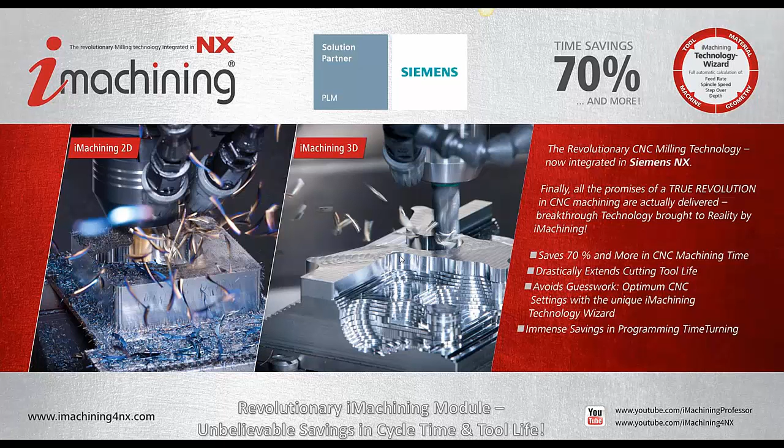So, a quick agenda. What we're going to do is I'd like to run through just a little bit of a history of iMachining for NX. Won't try to bore you to death with PowerPoint. We'll get through this as quickly as possible. But we would like to cover some of the technical differences between us and some of the other solutions out there as well. And then Greg is going to hop into showing you the actual software.

One thing I want to stress too, questions that come up, we'd like to address them on the fly. So if anything comes to mind or you want some more detail on anything, let's try to address them for you on the fly. So as far as the overview, we'll touch on how iMachining became a Siemens partner. We're going to talk about some of the technology differences between us and everybody else. We have one video at the end, and then Greg will hop into the software itself. So open Q&A at the end.

Siemens became aware of iMachining back at the EMO trade show in Germany in, what was it, Greg, 2013? Yep. Really were intrigued by what they saw and we approached each other, I think, and started development on the software. iMachining's been on the market. It's not new technology, 4 or 5 years, so you're not being a guinea pig. It's proven technology working around the globe. The integration to NX itself has just become our focus.

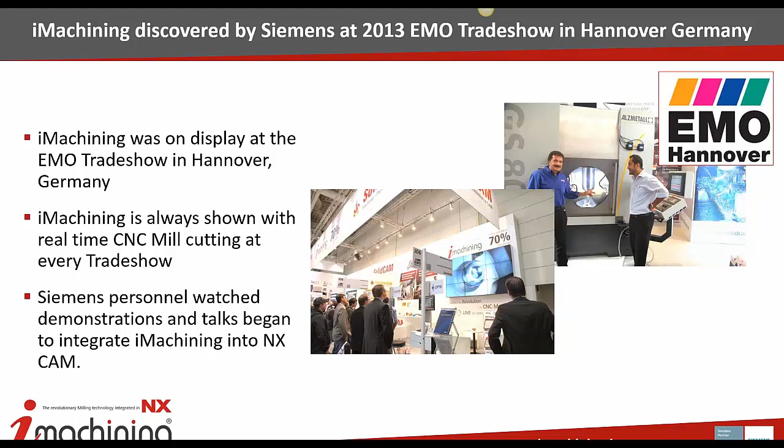So, a little bit of what it can do for our customers. Much faster cycle times. We're managing the tool's engagement in the material at all times, guys. So we're seeing tool life increases of anywhere from 2 to 10 times over traditional methods. Really performs well in the hard materials. Inconels, titaniums, the harder the material, the better iMachining is working. We're going to show you why.

The ability to use smaller, less expensive tools too, because we're managing that engagement in the material at all times. We're finding that customers can use smaller, less expensive tools and actually get better productivity. So, if people are familiar with NX, we feel like with the iMachining technology wizard and already having a background with NX, it should be easy to really learn the software and become productive with it.

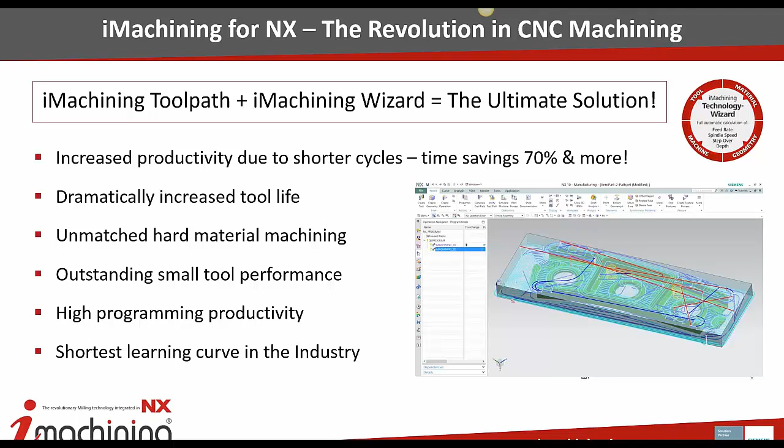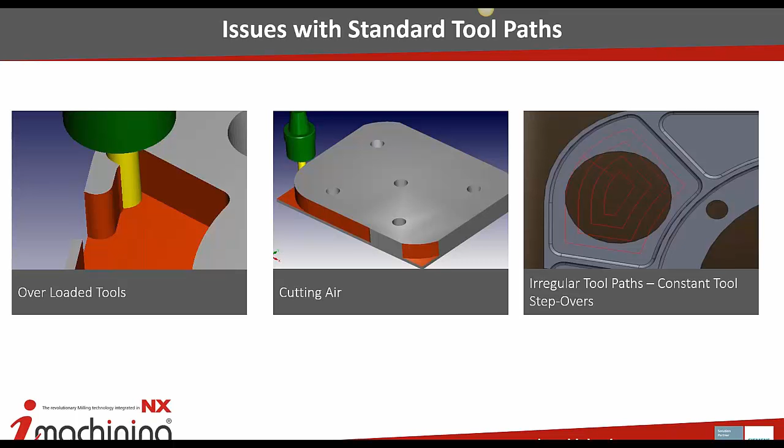Just touching on some of the technological differences between traditional milling and iMachining. Some of these scenarios might look familiar. Typical milling or machining, you're running a tool into 180-degree engagement, and that's tough on the machine, it's tough on the tool. You have to slow things down in order to accommodate for those corners. So typically, if you're not working on a model, a lot of air cutting, and also irregular tool paths. So you're typically using constant tool step overs.

So some of the things that iMachining is going to do, I'll throw this over to you, Greg, if you wouldn't mind. So what we do is we maintain controlled step overs. We're looking for a minimum and maximum engagement, and we maintain those. And as we're doing that, we're also adjusting feed rates as well. So if your engagement goes down, your feed rates go up to maintain a consistent chip load.

As we're machining, we're constantly updating the in-process workpiece. So we're aware of where we've cut, and we know where we need to go. And we're always trying to do intelligent transitions from cut area to cut area. Sometimes we determine that we're not going to retract completely out of the part and move over. We'll slightly move down or slightly move up a couple thousandths and transition to the other side of a pocket at a fast speed. We don't typically rapid when we do that.

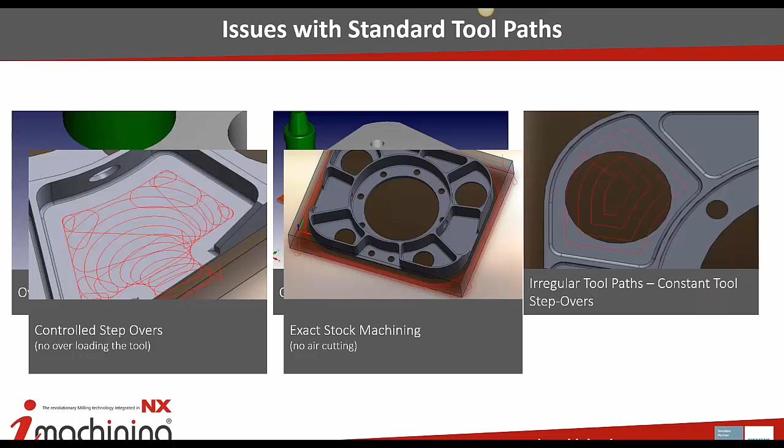We give the customers the ability to rapid. The majority of the time, we control like a 500, 600, or 1,000 inches per minute feed rate over to the other position. And we can transition around the part and do a contoured transition to another area. Smooth tangent tool path, so we're always trying to roll in and roll out of the material. So you're getting a thin chip as you're going into the cut, and you're getting a thin chip as you're coming out of the cut, to make those transitions easier.

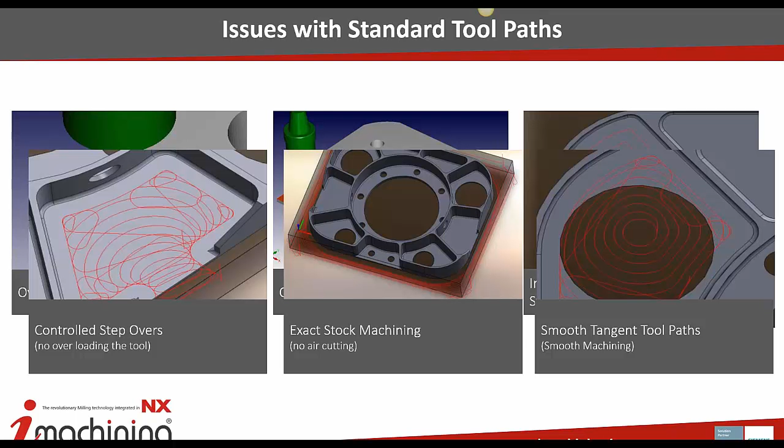Can you speak up just a little bit? Sure. Sure. Recording.

Some of our patented features in iMachining. One thing we do that nobody else is able to do is a spiral morph, which is the most efficient way to remove material from a specific area. And we do that by maintaining a minimum and maximum engagement. And working from the center out, we start at a spiral, and as we transition out, we try to create the shape of the boundary that we're cutting.

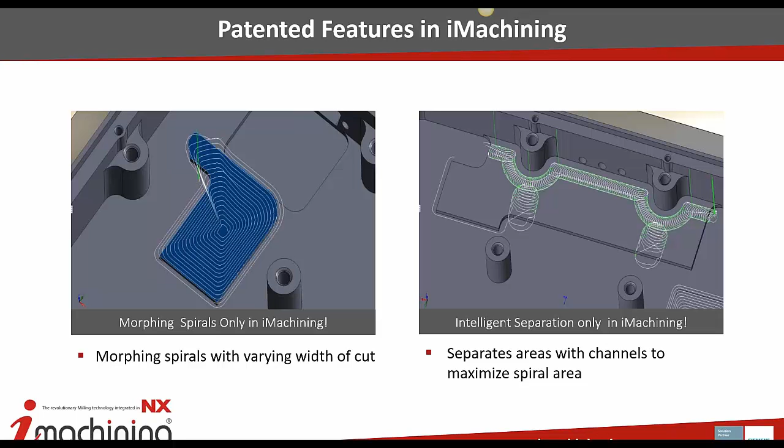Another thing that we do is separation. So we look at a specific area and determine, would it be more efficient to do a spiral morph for this whole area, or would we separate it out into individual channels and then create 3 independent spiral morphed areas? So we do time calculation with both results, and we pick whichever one's faster. This kind of shows what a finished channeled and then spiral morphed area would look like.

Some people in the room might be familiar with the term trochoidal, and we get compared with that a lot. We don't do a traditional trochoidal. We do what is D-shaped contouring when we do a slot. So we transition, engage into the material, make a cut, transition out, move slightly up, and fast feed across. So you're not doing a consistent feed rate and doing large circles.

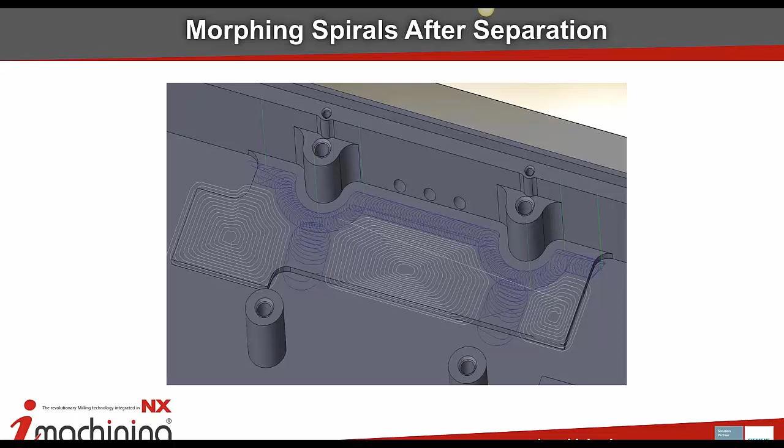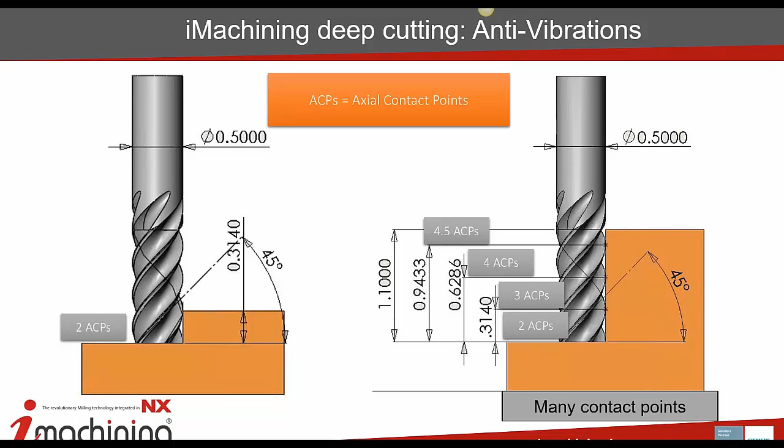Another thing that we do when we're looking at cutting tools, and you provide us with information on helix angle, the type of material, one thing that we're looking at specifically is the helix angle, and we try to maintain what we call ACPs, which is an actual axial contact point along the flute. We try to maintain a minimum of 3 contact points based on your depth of cut to add stability to the process. So you're not getting an interrupted flute coming in and out of the cut without another flute being in contact at the same time.

This is an example of rest machining in specific areas. You can see that we tried to do as little motion as possible. We transition down in the part. We're not retracting up unless we have to.

It's kind of interesting because the genesis of the technology, everyone, was for corner picking. And the developers at our company started figuring out, boy, that's an efficient tool path. How can we apply that to cutting an entire part? Went to work on that, and it's really been a nice solution.

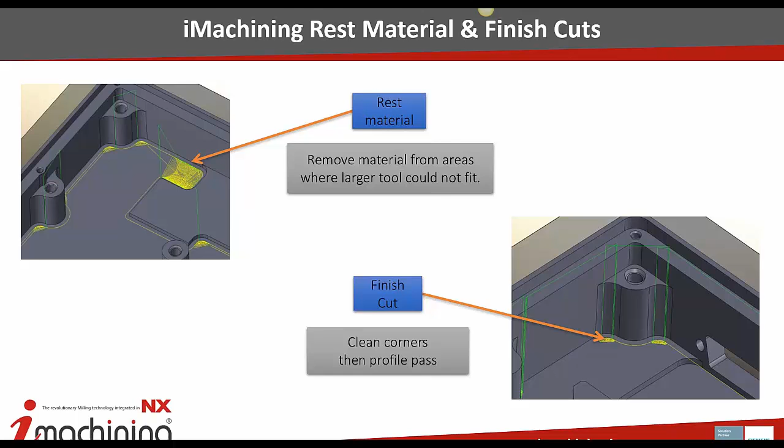Another thing we do that nobody else is currently doing is what we call scallop height tolerances. So when we manufacture a pocket, we'll go full depth, and then we'll do a scallop height calculation. If you're on a contoured surface or an angled 5-axis wall, we'll come back after we went full depth and move up those features and create a scalloped area. So you're not having to create a semi-finished path to come back in and clean those areas up to go into a finished operation.

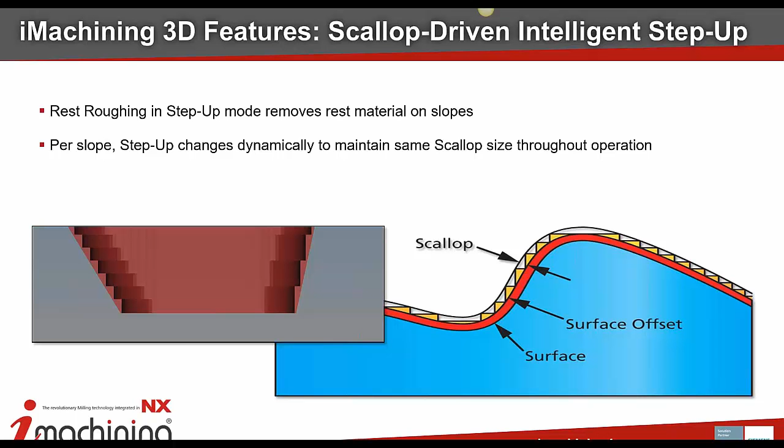This is really kind of what we're utilizing with the iMachining technology. And in a nutshell, we're taking into account the machine, the material being cut, the geometry of the part, and the tool that you're using, and giving you what we call a machining level. Greg's going to talk about this in the software, so I won't beat it to death right now. But it's really like putting a skilled machinist at your fingertips.

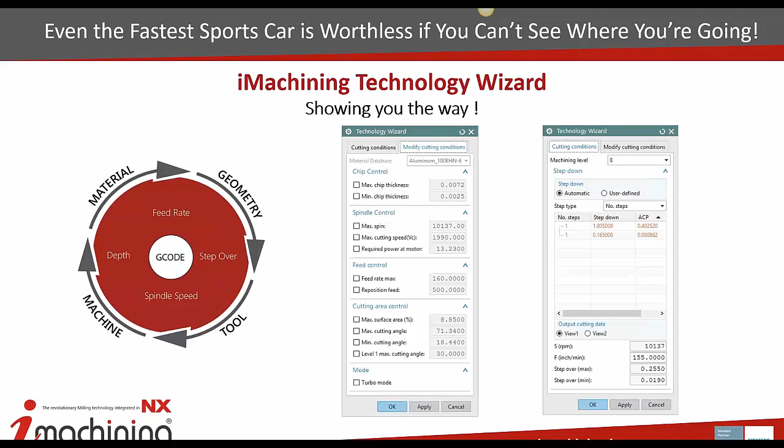And for anyone in the room that is a highly skilled machinist, I feel like it really gets you to most efficiency on that first part versus having to guess or kind of slow things down to make sure you get it and then ramp that up. So we'll talk about this in a little bit more detail. It really can help improve efficiency all around. Again, there's 4 things that we're managing. Material, Craig, if you would.

These are the things we look at in regards to the material itself. Hardness is one of the keys. As far as the tools that you're using, those are what we're monitoring. And it's situational per the part and per the job. So we're analyzing that each time you're having to program a part. The geometry itself, we're looking at the maximum depth going down as far as we can every time. And then the machine, we're looking at the maximum power of the machine, the maximum spindle speed, and the maximum feed rate. So we're doing all the hard work in the background based on these parameters.

Again, not to run any of my competitors down, but what we're seeing is they're doing full engagement, full depth cutting, but there's still a lot of manual data that has to be entered. I've seen one where you have kind of a spreadsheet. Machine could be this and material could be this, and you're having to kind of figure out. We're doing that all automatically for our customers.

One thing I'd like to touch on is the max power. So one reason we do max power is if you do a lot of aluminum machining, we have the ability to base feeds and speeds and depth of cut based on utilizing as much horsepower as possible. So we'll increase feed rates, increase depths of cuts, and based off the type of material, we will determine how to get it to the maximum horsepower.

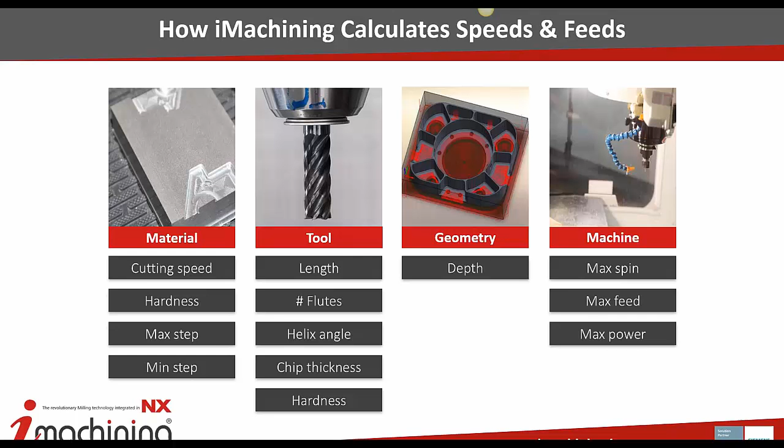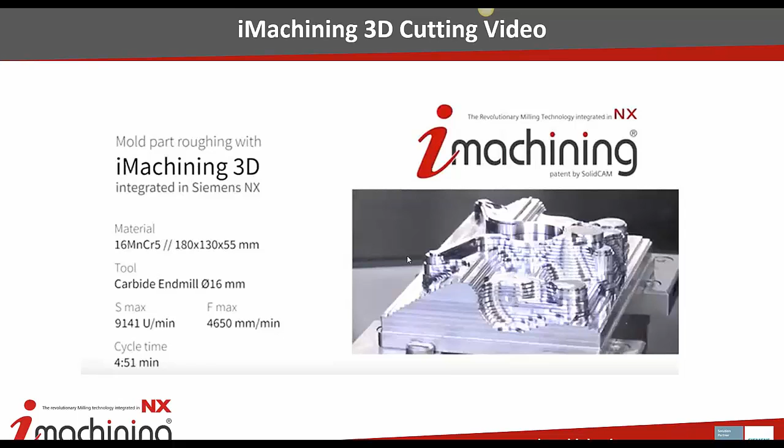Everybody still awake? I got an eraser up here. What is this one? 3D mode. Yeah, you can show that. You get your phone camera.

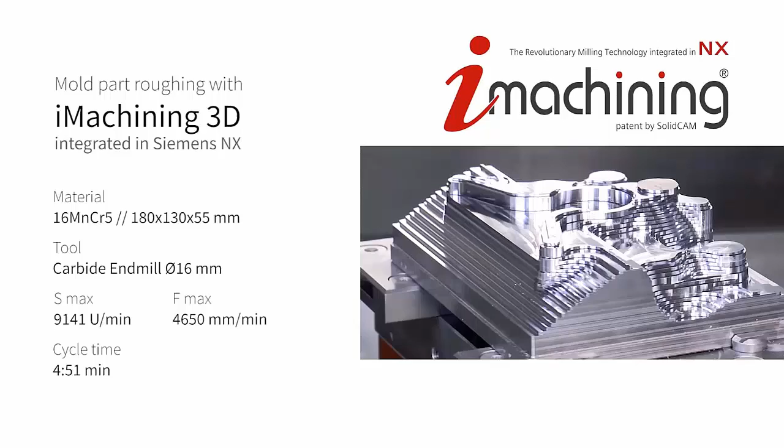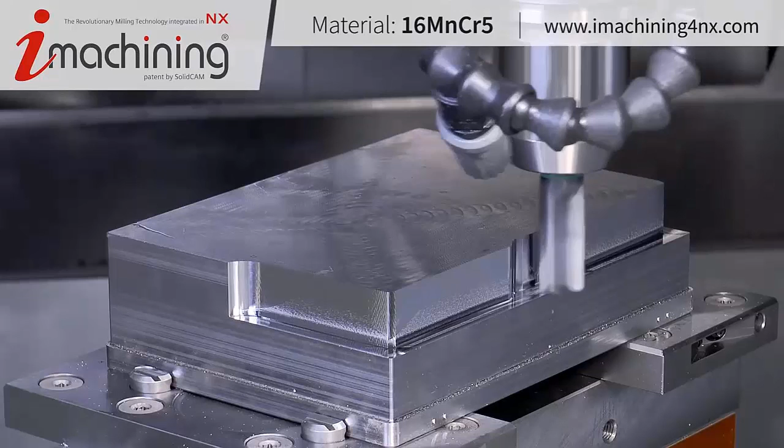A short video and then we'll... So this is a good example of scallop and how we maintain it. You'll see how we're trying to pull that at first, spiral morphing in, creating final shape, doing the final taking the corners. So as you can see, when we're transitioning back into the other corner, that's not at a standard feed rate. We're just doing a fast feed to get back there instead of doing the traditional coming back up, going over the part, coming back down and wasting time.

You can see right here is a good example of that transition. Different angles, all these points are identical, so it really helps speed up the finishing to do better finish faster. Less stress on the tool and the machine. And it's not on a Z-level base. So if we have a feature, as you can see here, that is not as steep of an incline, we do less cuts there. The area that's more steep, we'll add extra passes in there to maintain that scallop height.

One of the other common misconceptions that we seem to run across is, okay, great, I like the technology. Now you're going to force me to buy a $500,000, 25,000 RPM spindle machine to get the result. And that's actually false. What we're finding is even older CNC machines, because we're managing all those parameters, we're maximizing any machine, no matter what the age and capabilities. So we have had instances of people looking at having to add a machine. They got better productivity with iMachining and could put off adding another CNC.

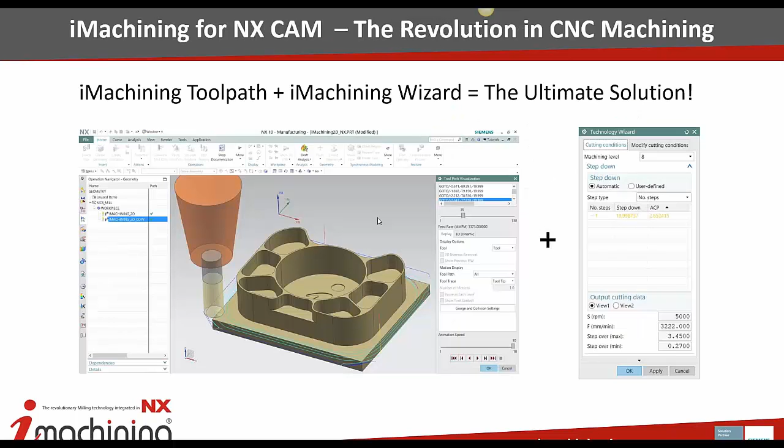That is kind of it, I believe, Greg, for the PowerPoint, correct? That's the last slide right there. Any questions? If there are any questions, we'll take those now. Otherwise, let's hop into the software. Anyone? All right, let's do it.

I don't know if it's better. Can you guys in the back tell me? Oops, not this one. Which one was it, Chad? Yeah, the one on the left. There you go. Is that good for everybody still? Nobody wants to work in my face. Another back.

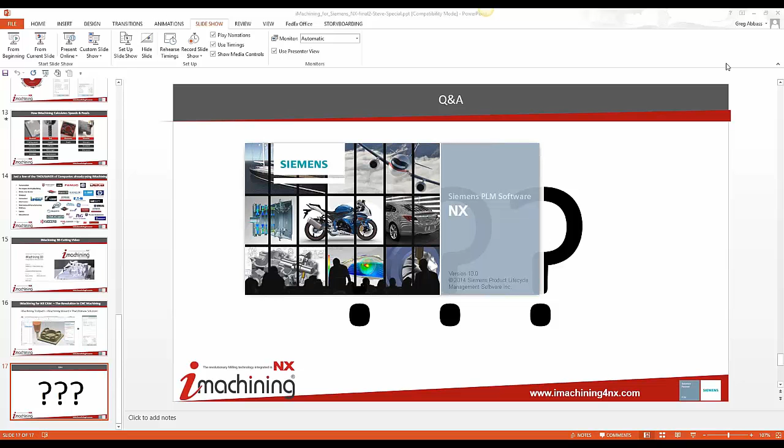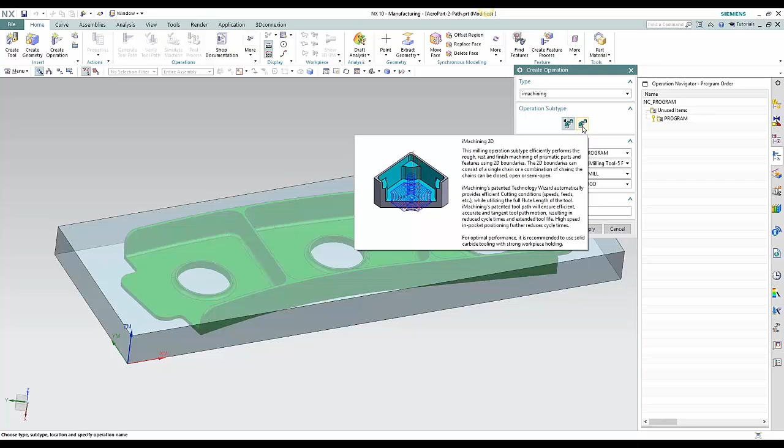All right, so to start off showing the software, I'll go over a few things initially. First being the two types of operations that we provide and where they're located. So typically, as in NX, you're going to go find iMachining in the drop-down, and we provide a 3D toolpath as well as a 2D toolpath. 3D works very similar to cavity mill, but with our technology. Geometry selection, you're selecting a part model, a stock model, check geometry, things like that. 2D, you're selecting a boundary, just like you would in planar mill. So we'll start off going through an operation.

I've already got some tools built, unless anybody would like me to go through building a tool or showing that part of it. Okay. Select the workpiece. So this is the interface for iMachining for the 2D side of it. We'll start off by going through some of the settings and how they work. We're looking for a few things. We look for what machine you're currently wanting to work on. I've got a few options there. And the type of material. We've got a pretty extensive library that comes in the install of alloy steels, carbon steels, tool steels. So we'll select aluminum for now.

And then we also look for something called a machining risk. What this does is gives you the ability to say, is my setup secure? Am I working in a vise low on the table, or am I working up in the air, and I'm kind of concerned that we're going to get vibrations? You've got the ability to adjust parameters based on your setup.

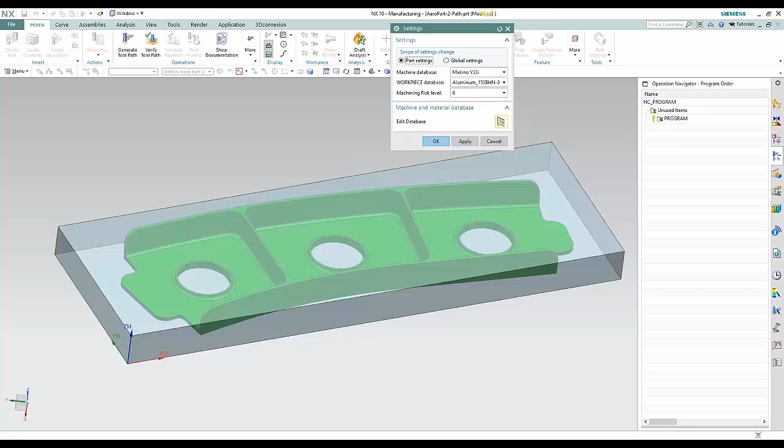And the steels, so if you go to create in the material database, if you go there to create a new material, so we'll just create a test material. What we're looking for specifically is the ultimate tensile strength. You can go to MatWeb online and get this for most materials that are out there. And then the machinability factor of that material. And then you have the ability to hard code some limits if you would like, or you can allow the system to do it automatically.

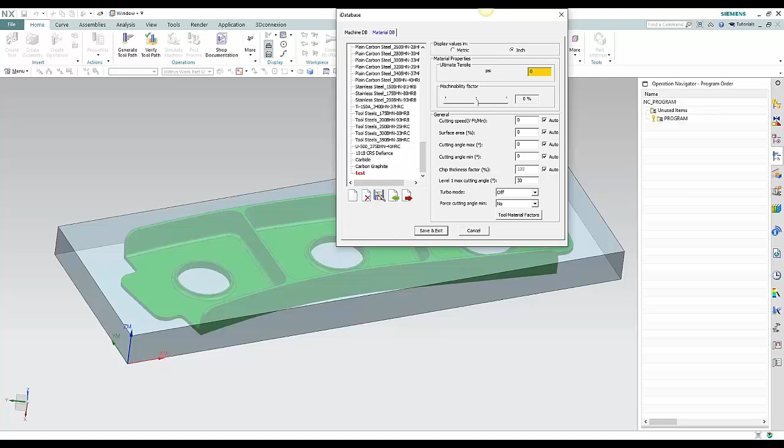So with that, we also have some technologies inside of 2D iMachining: iFinish, iRest, iRough. iRough is traditional roughing toolpath. iFinish is after you've created a roughing path. If you want to turn that into a finish, you just copy it, bring it down to the next level, and turn it to iFinish, regenerate, and then it creates the finish path for you. iRest, we can do one of two things. We can look at a previous tool, or we can select a previous iMachining operation to grab the updated stock from.

So geometry selection is a little bit different. It is internal to the interface. So we'll just come in here and we'll select these 3 cylinders. And then from there, you've got the ability to do 3+2 if you want to do it on an angle to the part. If you're doing 3-axis work, we'll leave it at standard tool axis. And we're also setting cutting levels in this operation. So we're looking for the clearance level, the upper level, and the depth. You can use model features to select this.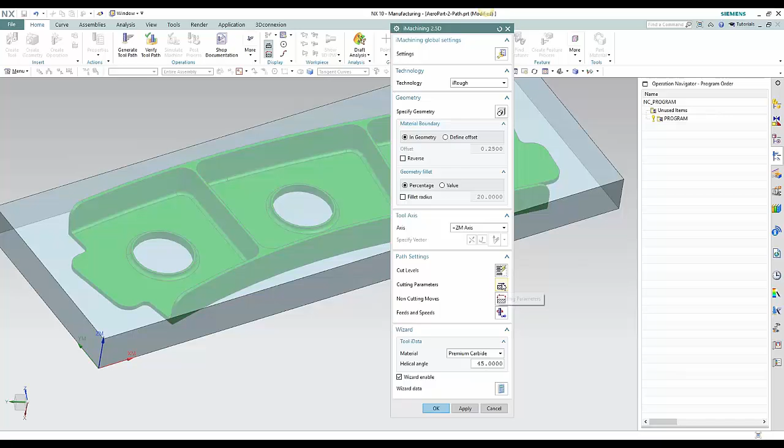Cutting parameters. There are some features in here to control specific things. You can control the step downs if you're not using the wizard. Wall offset, island offset, floor offset. You get the ability, so I showed you in the PowerPoint channeling. So you've got the ability to modify those channels as well. You can say I want the channel to be 1 inch instead of 3/4 of an inch wide. You can also do what we look for as a thin wall. So if you're coming up to an island or another thin wall and you don't want that wall to get below a specific thickness, we've also got the ability to control that as well.

Arc fitting, if you've got older equipment, instead of linearizing all the motion, we can kind of do a poor man's NURBS, if you will. We'll take those generated points and create an arc to best fit.

So from here, here's where your tool selection is. Like I said earlier, you've got carbide, cobalt, high-speed steel, and premium carbide. And then we're also looking for the helix angle of the tool to find out what the actual contact points are. And this is kind of a wizard, as you saw earlier. And we're looking for a few things here. Machining level is basically how aggressive do you want to be. 1 being the lightest cut, 8 being the largest cut.

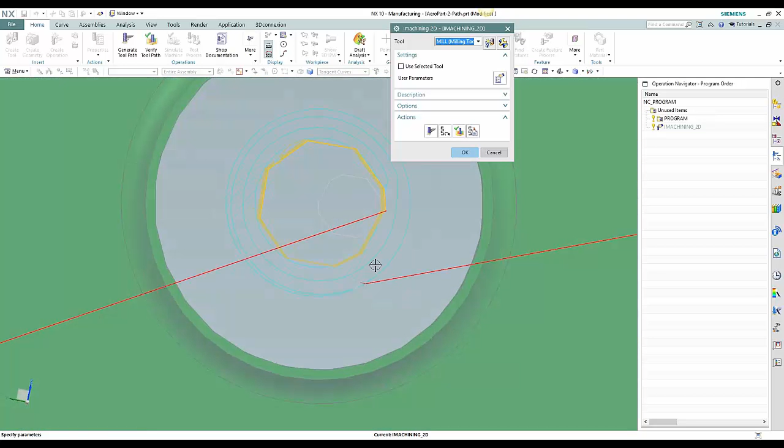So, from there, we'll generate the toolpath. As you can see, it's a circular hole, so you get a helical entry, and then you get a spiral out. Like I said earlier, if you wanted to create a finish operation, you can copy and paste it, come back in, change it to an iFinish.

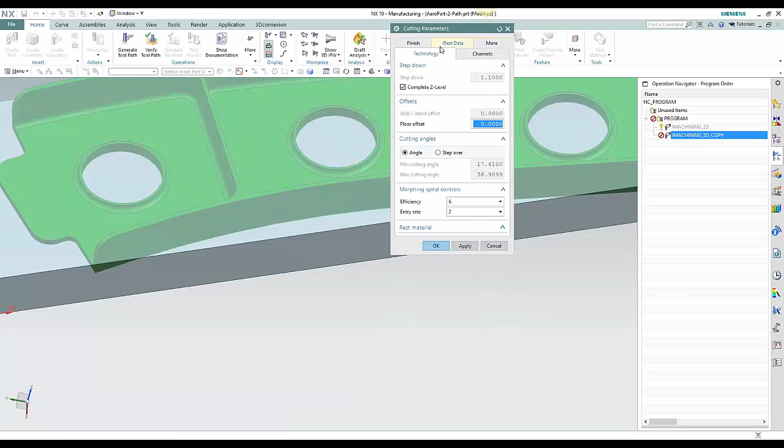Select the previous operation so it knows where it was, and generate. So now you've got a finish path.

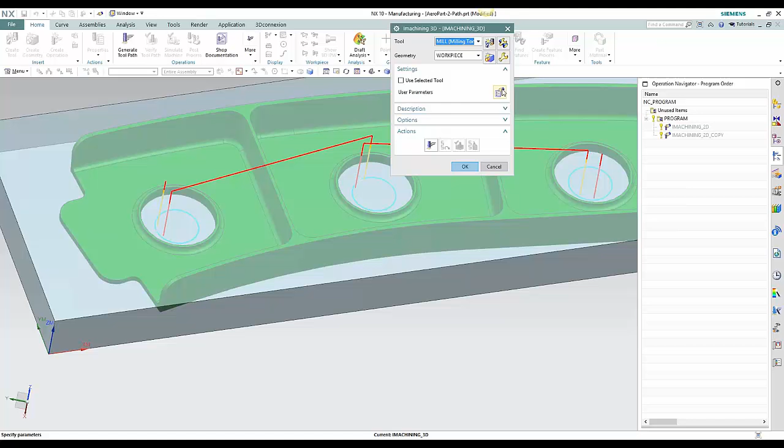So from here we'll go and we'll do a 3D iMachining operation. Majority of the interface is the same. There are a few extra things that may need to be filled out or used. We're looking for a geometry group with a part and stock in it. Even in the 2D operations, we do require at least having a geometry group built so we can update the stock and pass it to the other iMachining operations.

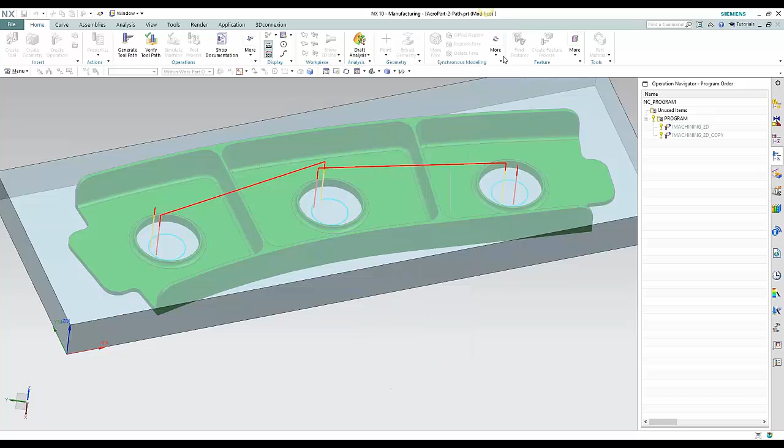Settings are the same. I don't have to come back in here and reselect everything. We update at the main level. When you create your first operation, it stays in the file. You don't have to push it or do anything. So it maintains all of its settings from the previous selection.

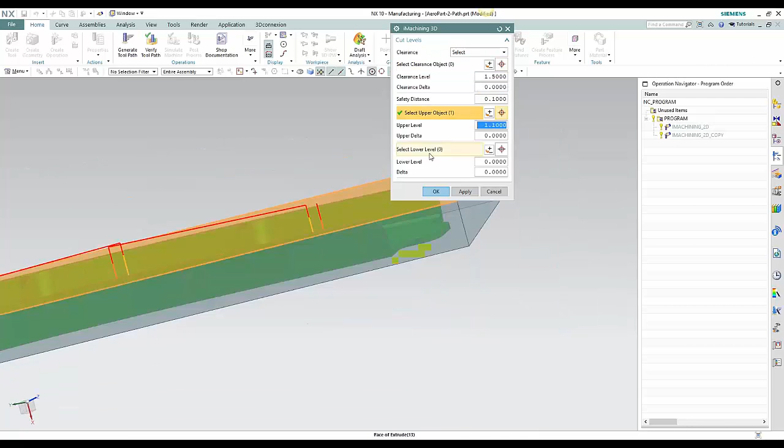So for 3D, we'll do the same thing. We'll select our clearance level, our upper level, and I'll come in and I'll just select a feature on the part.

So in the cutting parameters, there are a few things. So we talked about scallop height. You can either do it by scallop or you can do it by constant. Typically, I do it by scallop. You've got the ability to come in here and modify what you want that scallop height to be. If you wanted it to be 5/10 or 5/1000, you can come in and modify it. We'll just make it 150. And we'll generate.

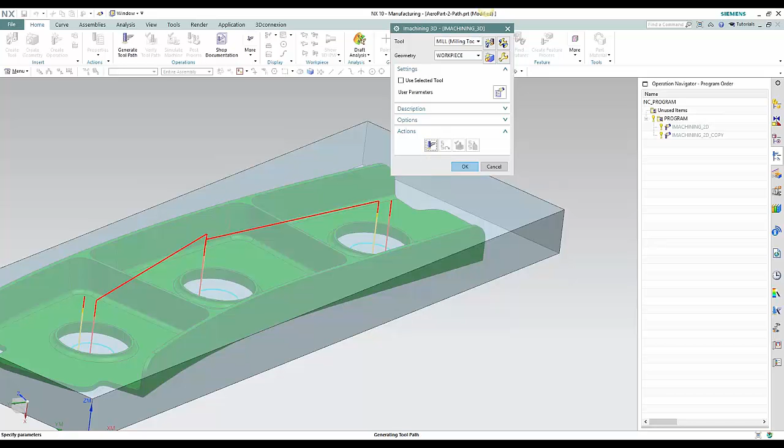Any questions while it's generating? Yeah, you can do an entry hole. You don't have to select an entry point either. We know the hole's there, so we'll use that if we deem that that's the most efficient way to get into the material.

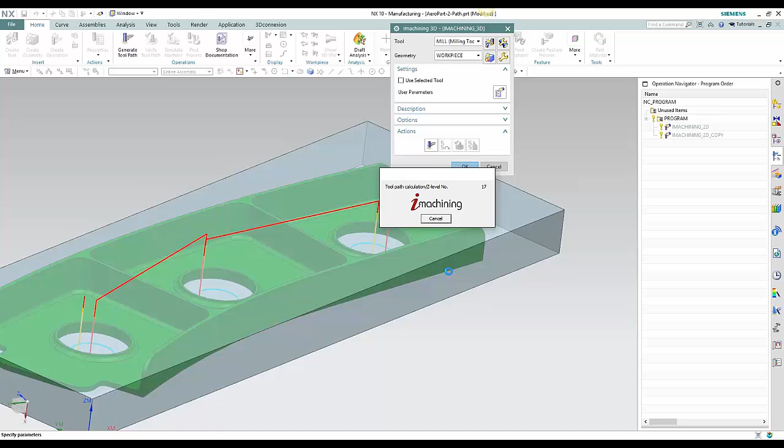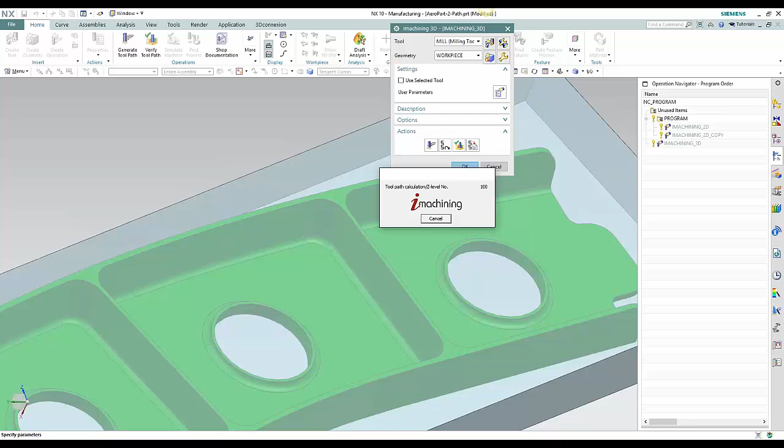So there's the operation. You also have the ability to do a trim boundary. So if you wanted to come in here and say, I want to do a working area, come in, select tangent curves, and say, I want to do that pocket there, and recalculate. This part's not big enough to show you. I'm going to open up a larger part and show you some of the processing stuff that's going on in the background as well. So you've got the ability to select a specific area if you want to stay inside of it.

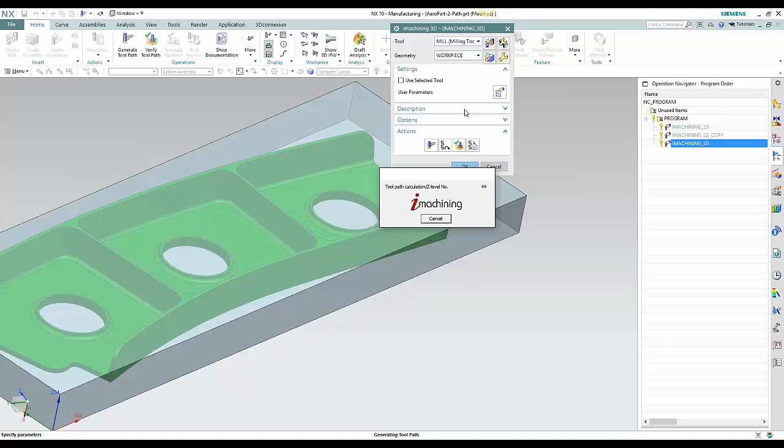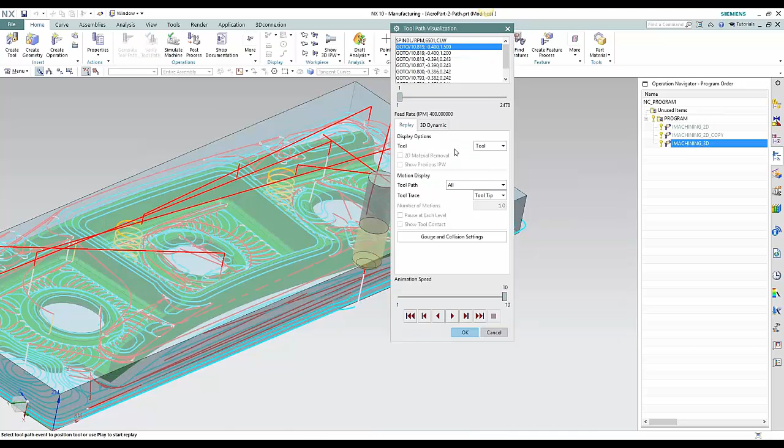And if you're curious how it works with Siemens internal operations, you can do a planar mill operation, you can do a 2D operation, you can then do a 3D iMachining, you can flip-flop back in and out of sequential mill. As long as you're updating the stock through a geometry group, we know what's machined and we use it as well. Verification works the same. So if you want to do a 3D verify, you can come in and do a 3D verification.

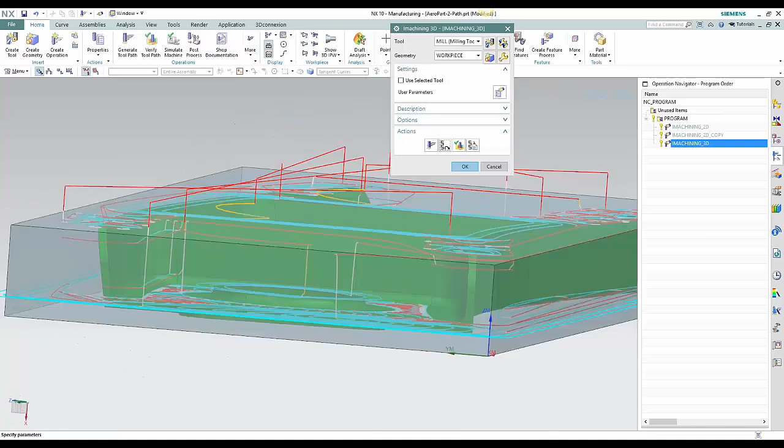Also, you can see one side's a 3-axis wall. The other side is a 5-axis swarf wall. So you can see where there's one path down at the main level on the 3-axis wall, and then on the 5-axis wall, we come back in and clean some of those scallop heights out that would be there because the wall's tilted out. I'll open up another part, kind of show you some other things.

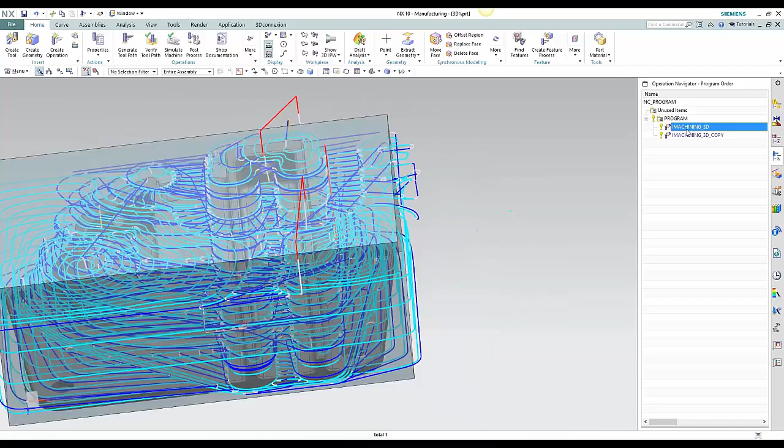This is more of a contoured part. So you can see we're coming in, we're scalloping as well. So we'll kind of verify this so you can see some of the motion.

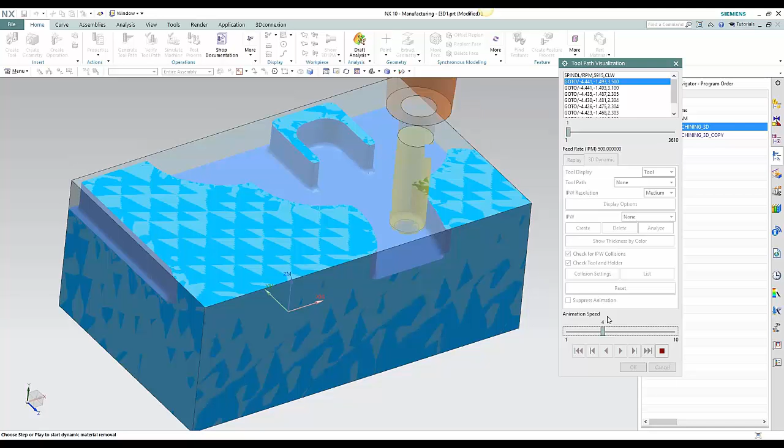One thing we do, I don't know if it's going to show it here, but if we do channeling, and then we come back from another direction, like it just did previously. As we exit, we also change how we approach the material. We try not to leave peaks, and if there's a peak, we'll come back out from the other side and roll into it and roll around it instead of just coming straight at it and trying to contact it with the flute of the tool.

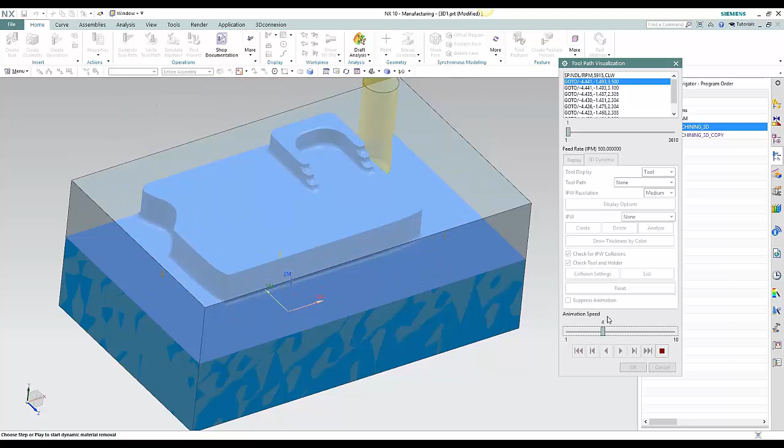So you can kind of see it does the main level, and then we're going to come back as soon as this finishes. We're going to pick up any of those scallop heights.

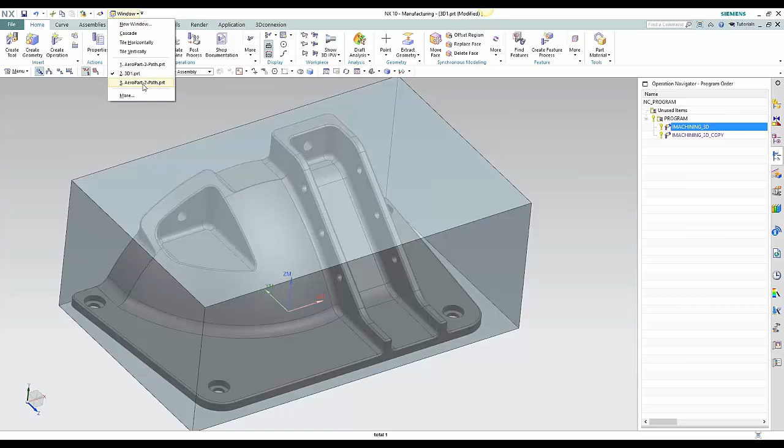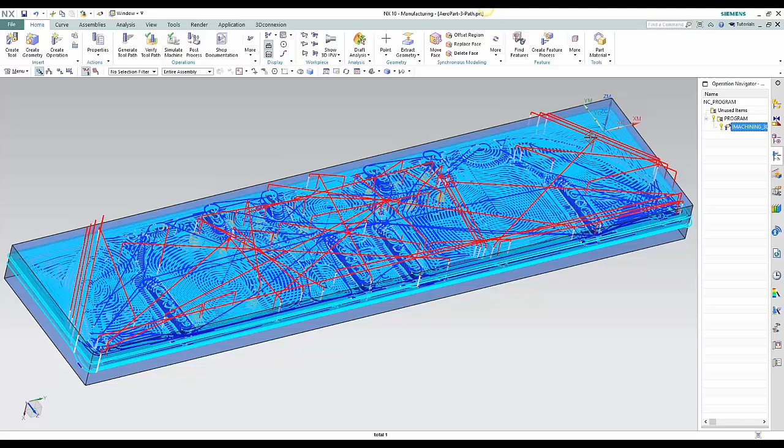I kind of wanted to show you guys this as well. It's a much larger part. I think the part's about 180 inches or 110 inches long by about 40 inches wide, so there's a lot of motion in there. There is an increased time for generation because of the size and the amount of motion, but we try to handle it as efficiently as possible to keep generation times down as well.

So if you see, what we do initially is we layer the part, determine each level, and then once we've done that, you'll see the CPUs will go. We'll utilize as much of the CPU as possible. Once we know the levels, we take each level and send it out to a separate core.

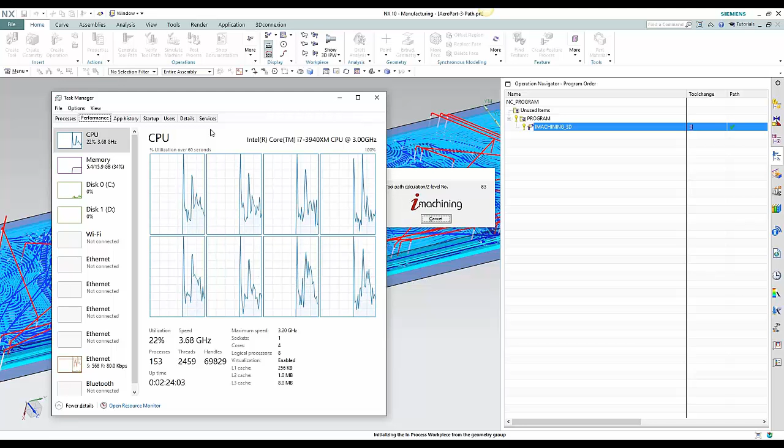You talked about the ability to kind of differentiate. You have some choices. You can really have iMachining pay attention to tool life or cutting speed. With level settings and stuff? Exactly. Sure.

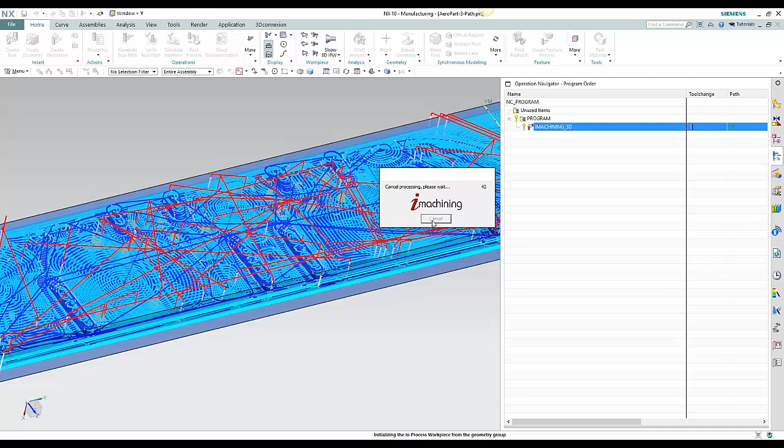Yeah, I got a question. You talked about how that 70% number was calculated between time periods. Can you give us maybe some case studies on that? We do have some. Or maybe some averages that you typically see. Obviously, that's a pretty big one.

Yeah, I mean, it's subjective, as any number is. It's based off of traditional type tool paths, full slots, taking smaller depth of cuts, and using a traditional style tool path. That is really what that 70% is geared towards. It could be less than that. It could be more than that. It depends on the specific application, and that's just kind of our rule of thumb of what we see on average from our users that are using the traditional constant step over tool path.

It's kind of interesting too, because Greg and I had, as part of one of the videos, an Inconel pocket that I believe a gentleman in Colorado was cutting, and he was getting one pocket per tool, and it was taking him about 2.5 hours. He investigated the technology, and it wasn't my customer, so I'm not sure of the specific numbers, but I know we were cutting that same pocket in about 20 to 25 minutes for him. And we cut 5 pockets. He had a bar of material. We cut 5 pockets, and the application engineer said he could probably have gotten 1 or 2 more pockets out of that same tool.

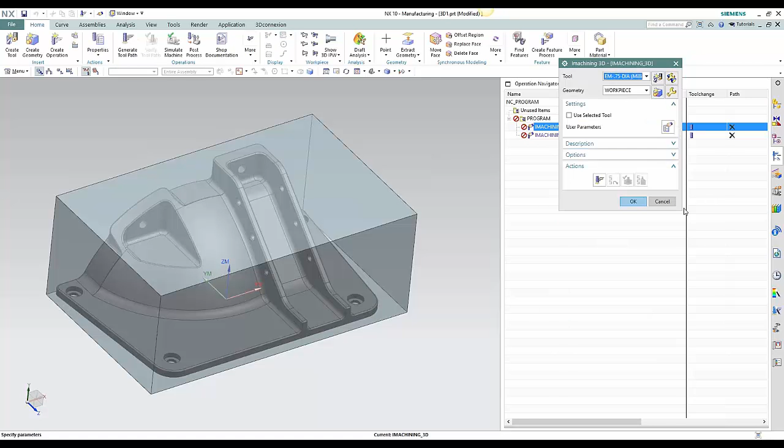You got anything that you'd like for me to show? Or? Do you have like a cavity mill generated anywhere? Yeah, we can do a comparison. Yeah. So let's go back. So I guess kind of what we have currently is a cavity mill, and you don't even have to do trochoidal if you don't like. You just do a regular cavity mill operation, and then compare it to iMachining.

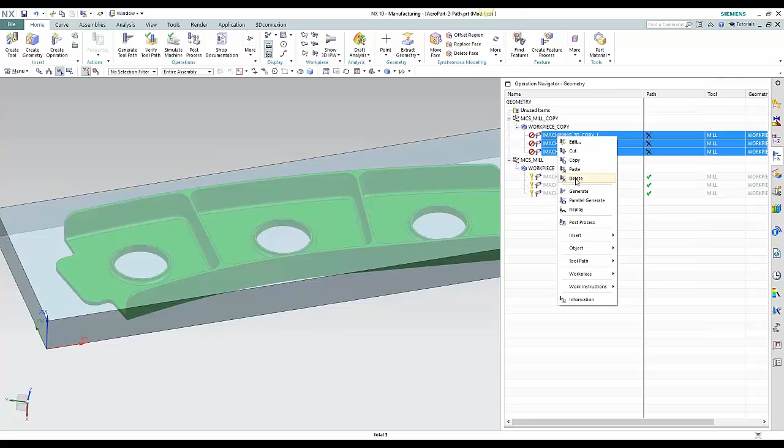We were in class the other day and just did a simple part, and we tried to guess at what we would use as far as speeds and feeds on the cavity mill operation. And we put them fairly close to what the iMachining operation was doing, but we knew that tool was going to engage in the corners, and you can even see it in the verify. That tool is going to engage in the corners, and it's not going to last. It's either going to wear or break, one of the two with cavity mills.

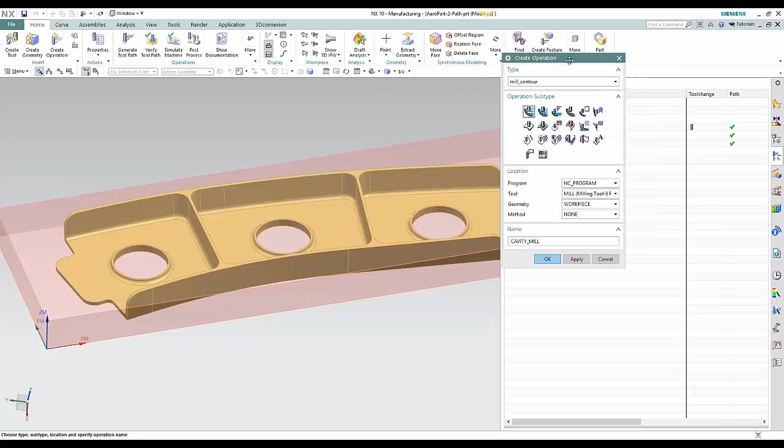So what we end up doing is slowing things down, taking smaller step downs, and so instead of that, this basically does it all for you. The other thing I really like about this, and again, this is new to NX, so it is new to us as well. So I've just now started kind of testing the software, and the technology wizard. That's the correct term, right? Yep. The technology wizard. So that gives you a good starting point.

I'm not real familiar with a lot of the harder materials, so that gives you a very good starting point. And then go test it, and then adjust from there. So that is one of the things that I really liked about it. I was able to just install the software and start creating tool paths pretty easily.

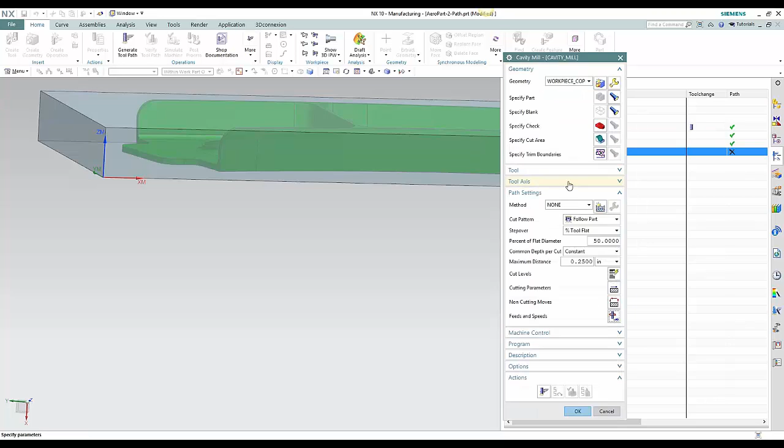So we had the material based as an aluminum part. I'm going to keep the RPMs the same, and I'm going to do a feed per tooth of 10 thousandths to give it a little bit of an advantage. So we're going to do 130 inches a minute. But we're going to do a 1/4 inch depth of cut because we're not maintaining a constant step over. So is it driving, you try and maintain a constant cubic inch? Is that what's driving it, or is it trying to maintain an engagement? It's an engagement. Yes.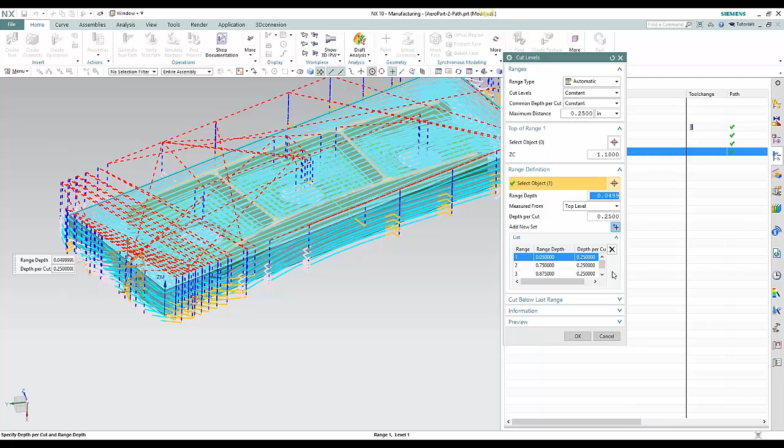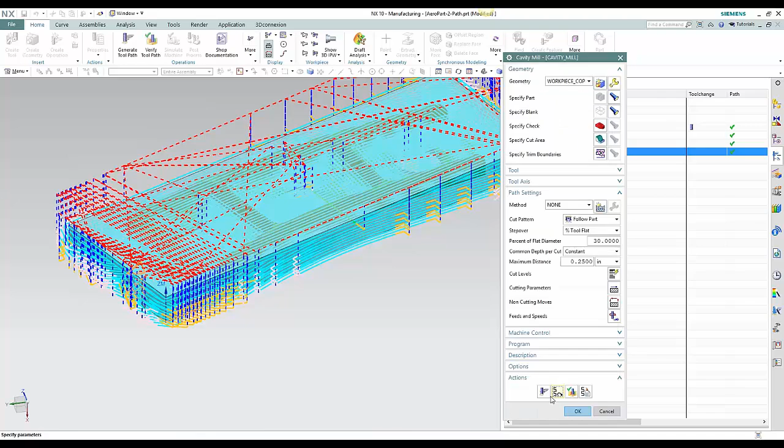So we're going to do a 30% step over. We'll be a little generous to it. We'll turn on smoothing and give it a big enough radius so it's not going to slam the corners too bad. So let's see here. Apples to apples, 34 minutes to 13 minutes. And that's on an aluminum job, which is a pretty big savings as far as motion is concerned. And you feel like the harder materials, that's where we really start to shine. Yeah, the harder the material, the better. Yep.

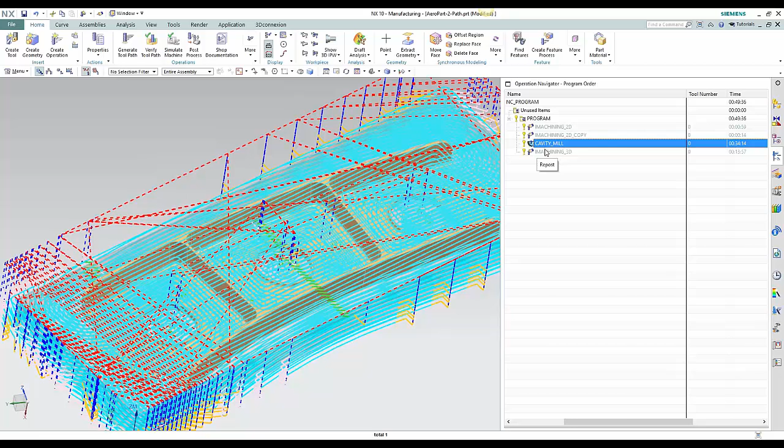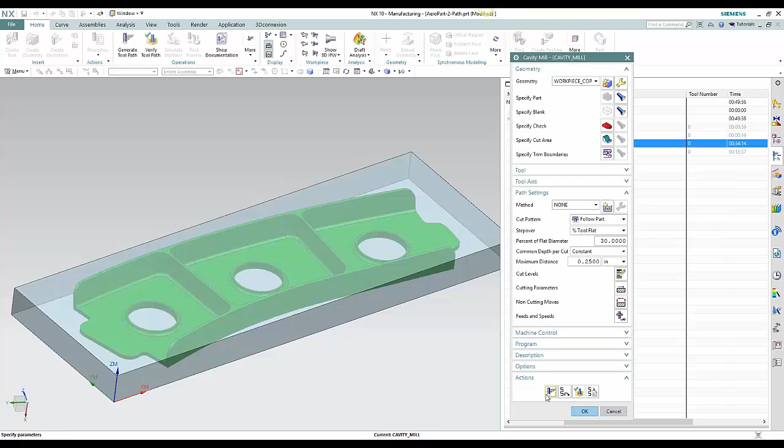And the other thing to notice, this is NX time, and you guys know as well, as soon as that program gets to the floor, that 34-minute path takes 45 minutes to an hour to run. So the savings is exponential. Any other suggestions? I don't think so, unless anybody else has anything else. Well, let's try and be a little bit more friendly to NX. We won't let it come up. We'll go zigzag and climb conventional with it. Maybe it's a coil or something. Zigzag. So a little bit less of the engagement stuff.

Moving forward, if you guys are interested, is there a scenario where you can do a trial? I mean, I can get you a quote, but how typically do you do it? Really, whatever makes the most sense. I'd certainly like to do a private one-on-one overview where we can show you in a little bit more depth how the software operates. We like to do the workflow of the software on basic parts. Then we would love nothing more than getting a part from the customer and doing an overview, to show you how we'd approach your part with iMachining.

Yeah, by all means, we'd like to see it in use at your shop. We could provide trials or eval versions. Not a problem. We definitely prefer doing a little bit of a hands-on approach. That way, when we let you loose with it to do what you want to do, you at least feel comfortable enough. Is it where they would send in a sample part, and then you guys would run the tool path on it, and then send that back? Yeah, we would send it back to them, and then we'd also set up a meeting and go through some of the operations, make sure any questions they have could be answered on a one-on-one basis.

And along those lines too, licensing. So it is a floating license. So it's however many users. So it's set up as a floating license, so as many users as you do licenses. And by floating, it's not a,

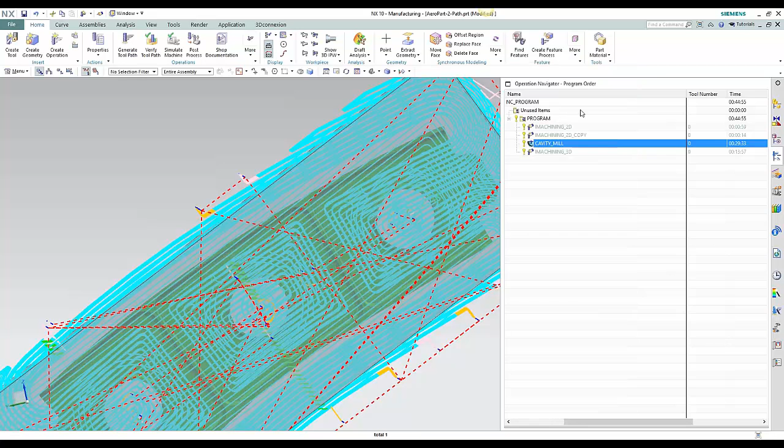I've opened NX, so I grabbed a seat. It's, I opened iMachining, I grab a license, I close it, it sends it back. There's no checking in, there's no checking out. It's strictly driven by opening up iMachining, or if you're external and you generate, or you're doing anything with that operation. Once the operation is closed, it's checked back in. You don't have to close NX, you don't have to do anything else.

So that's something to definitely point out, that it is a big advantage, which is actually how all the rest of the NX operations are working as well. But some other solutions aren't, or maybe not like that. So definitely an advantage to be able to use however many units we have. Again, operation's closed and somebody else can use it.

So. Craig, there was a question back here too. There is one other, maybe, competitor. We don't think they are, but could you just maybe discuss a little bit the differences between iMachining and the other? Sure. Most of our competitors do not give you any ability to calculate speeds, steps, or cuts. They don't. It's all manual entry. You've got to figure it out on your own. And that's where we think one of our largest competitive edges is, we try to help you get there. At least have your best success first time right.